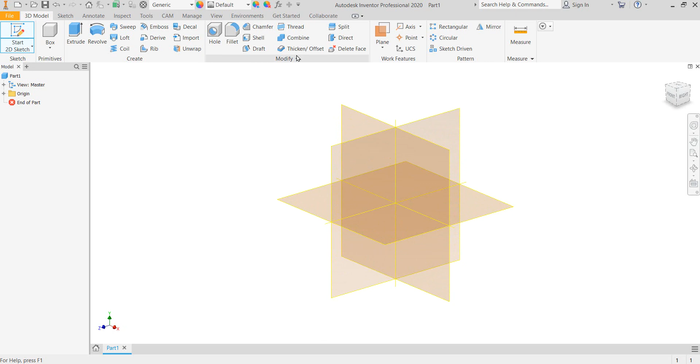We're going to start with an inch English part, and I want to do a 2D sketch on my front surface plane. I want to start with the cylinder at the left end, so I'll go with a circle at the origin.

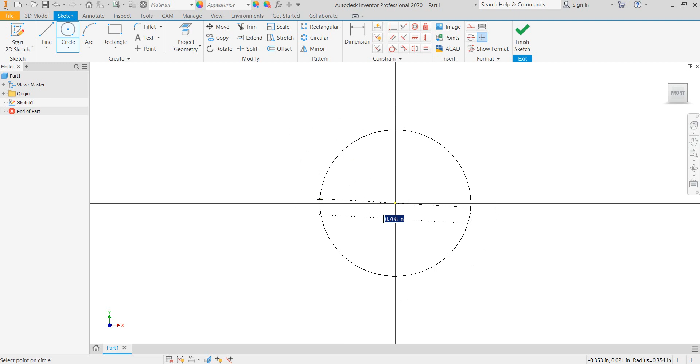This has a diameter of 1.25. Let's extrude that symmetrically, 1 inch thick. Okay, so that's got my cylinder to the left end.

Now I want to do the arc at the right end, and the reason I'm doing this in different pieces is because we have different thicknesses of extrusion. So I'm going to start another sketch on my same front plane, and I'm going to do a circle, and this one has a radius of 1.25.

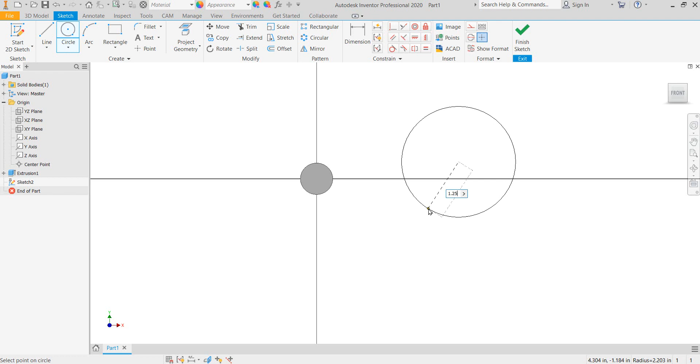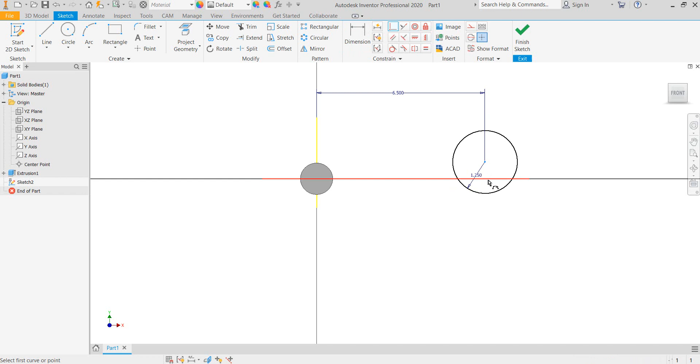I want to dimension it and align it, so I'm going to project some geometry here. We see that that is 6.5. I'm going to do a coincident constraint onto the axes there. I'm fully constrained, and so now I'll extrude that symmetrically, and it is 1 inch thick also.

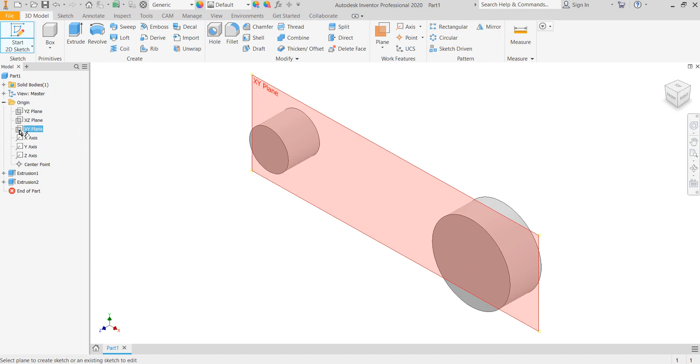Did that go 1 inch thick? Yeah, alright. So now we'll do another sketch on the same front plane, and this is going to be my handle, the horizontal part there. Let me slice my graphics so I can see things a little better.

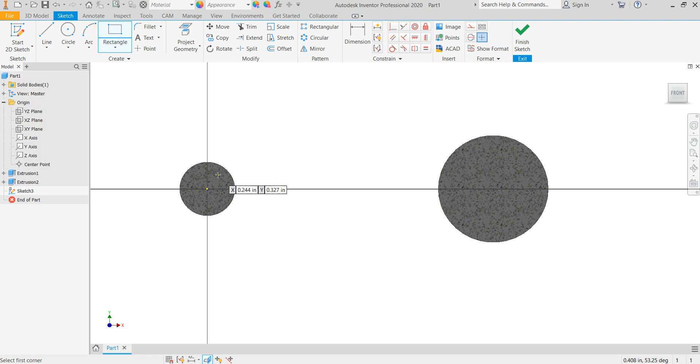We can do a rectangle, or it doesn't matter, we can do lines. The problem with rectangles is once we trim it, we end up losing some features. So I'll go ahead and do that. This is going to be kind of wonky out here, so I'm just going to draw it.

Then we've got a couple more arcs, so I'm going to put a circle and another circle. Let's get this one taken care of first. The height of that is 0.75, and I want it to be centered, so I just did 0.75 divided by 2, which centers it up.

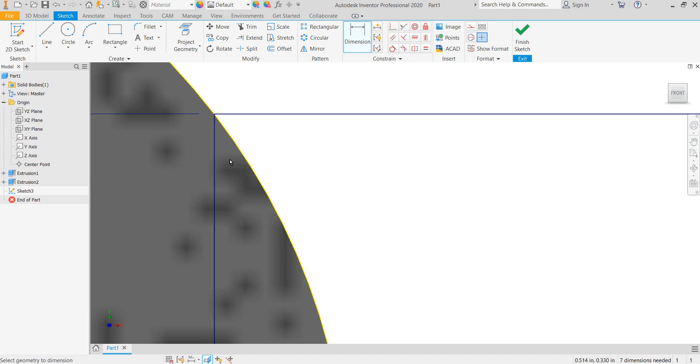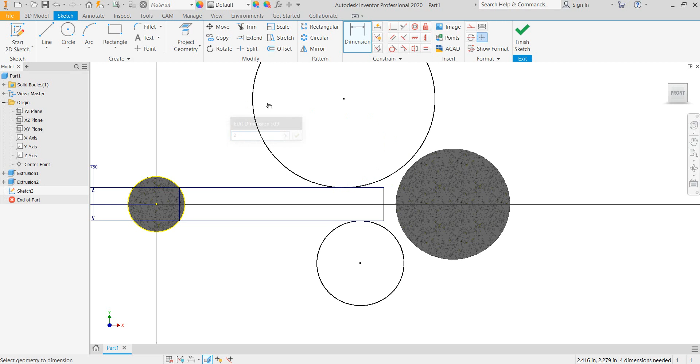It should have a coincident constraint on that corner. It does, okay. Now then, let's go tangent this circle to the top, this circle to the bottom. These are a radius 2 circle, so dimension type radius 2.

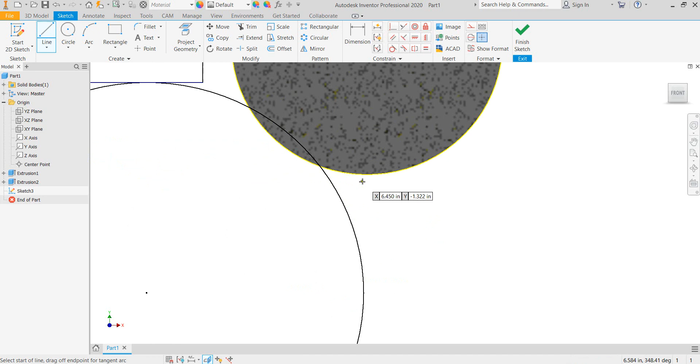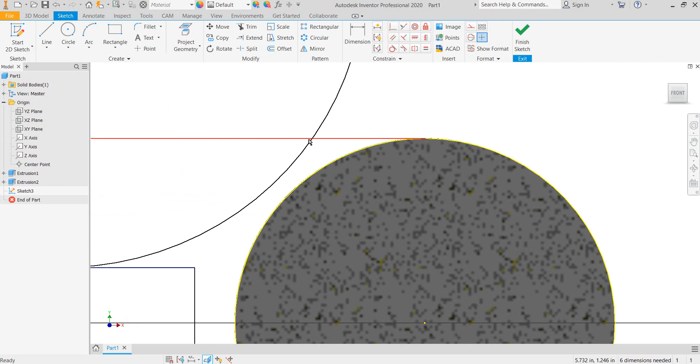And let's go with an equals constraint. Now then, we need a line that comes from the top of that over horizontally, and let's do that again at the bottom. We notice it's 0.75 back to this point right here, should be 0.75.

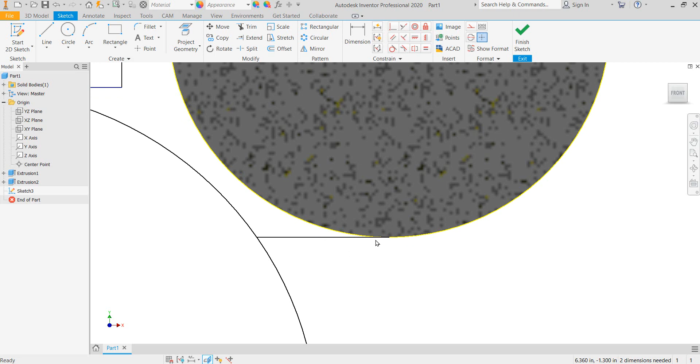So let me trim those lines out and do a dimension there, and we'll do an equals constraint. That one didn't get a coincident on there, so let's try a tangent on there. Okay.

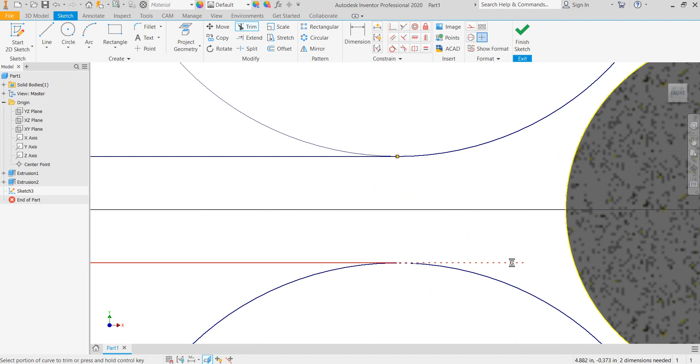Now let's trim a bunch of that, and let's put a connecting line across there. That's kind of weird, okay.

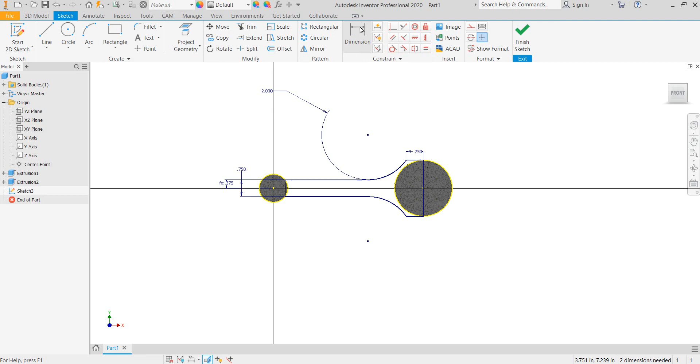Alright, so now it's asking for some more dimensions. Let's just see what Inventor says we need. We ended up with a weird little point right there, I'm not sure where that came from.

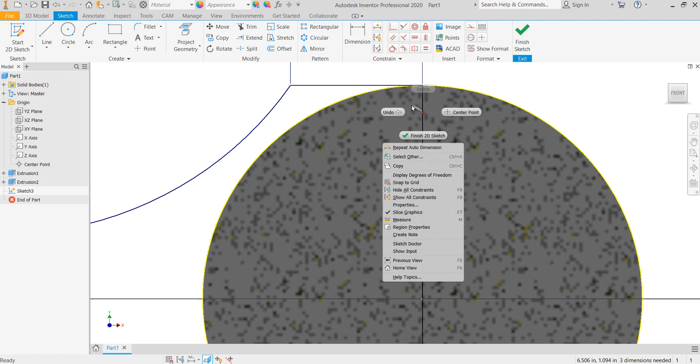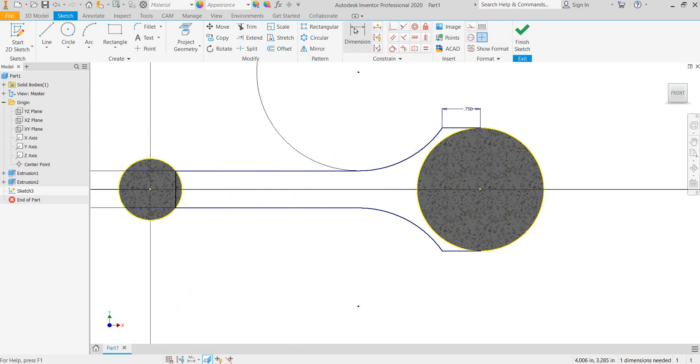But now it says I need 3 dimensions. Weird. So I'm going to... there, what is that? I'm not sure, I ended up with a second line in there somehow. So let's draw a new line connecting those.

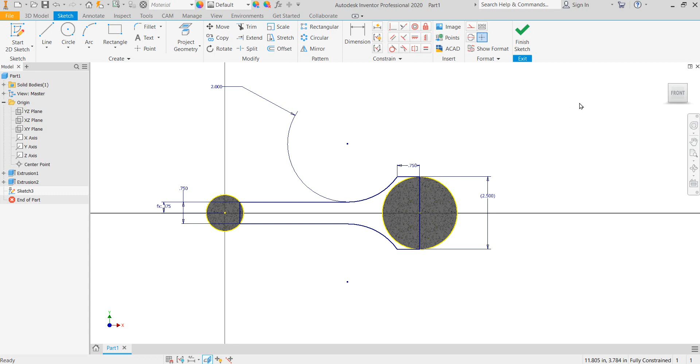Okay, what does it say I need? Ah, okay, needed a constraint right there in the middle. So that's cool, and now I can extrude this. I want to go symmetrical, and it is 0.5. That's looking pretty good.

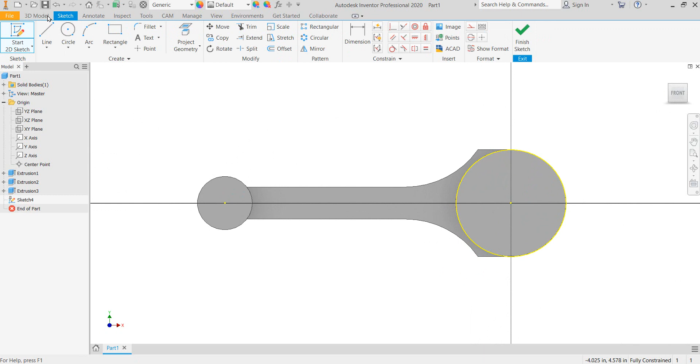So now let's cut the end of this off. I could have done that earlier, so I'll do a sketch on that plane and draw a line through the midpoint there, and we should be able to extrude and cut that. So I'm going to cut through all. Okay, that's looking right.

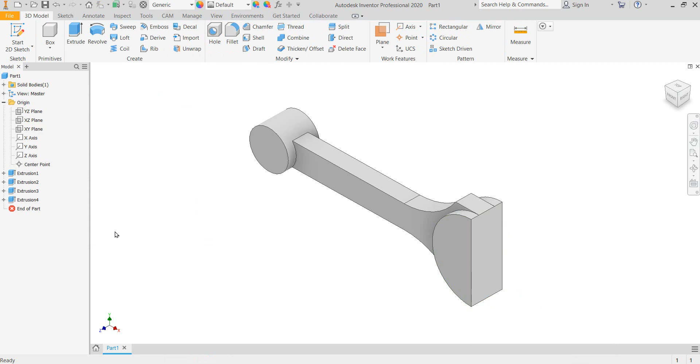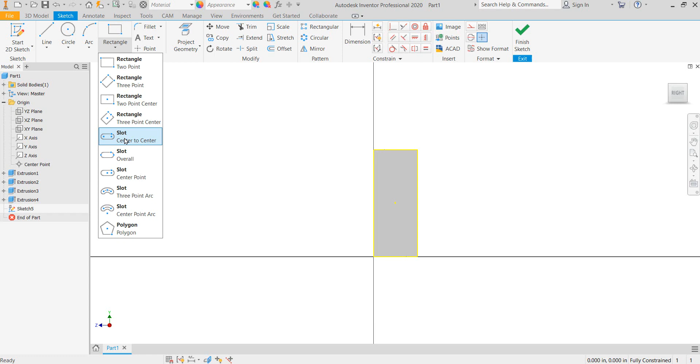Now we're going to use the slot tool on this end to create the rounded parts at the top. So I'll do a sketch on this surface and go to my rectangle, pull down, and go slot. Let's go center to center—no, I think slot center point probably works best. So there's my center, because of my axis, my origin, I'm going to click there.

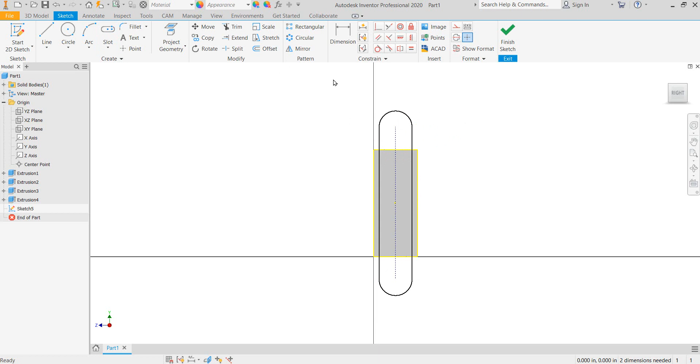And just drag straight up, so I got a perpendicular constraint, click, and then go out. Now let's put some dimensions in. This has a radius of 0.25, and it is 3 inches total end to end.

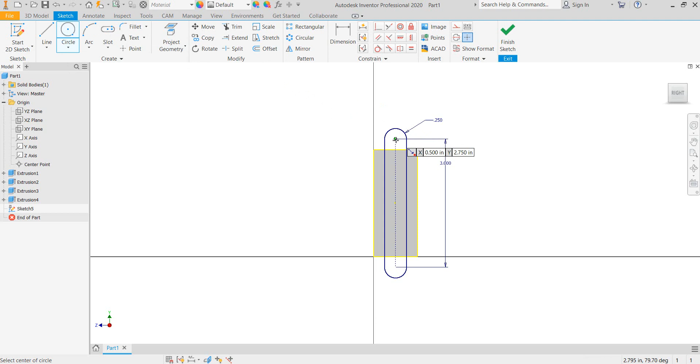Okay, and my hole goes all the way through, so I can go ahead and put in these holes here, and they are a diameter 0.25. Do another one at this end. 0.25, that should be diameter. Yep.

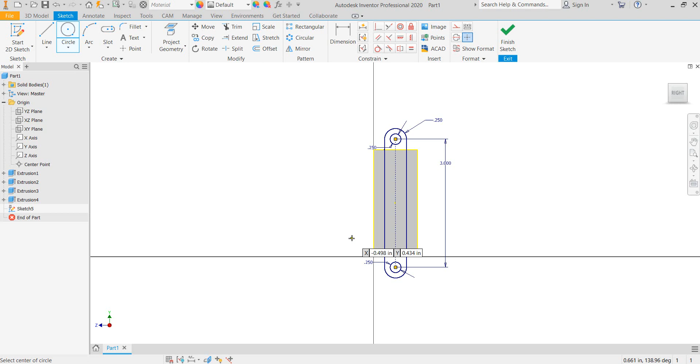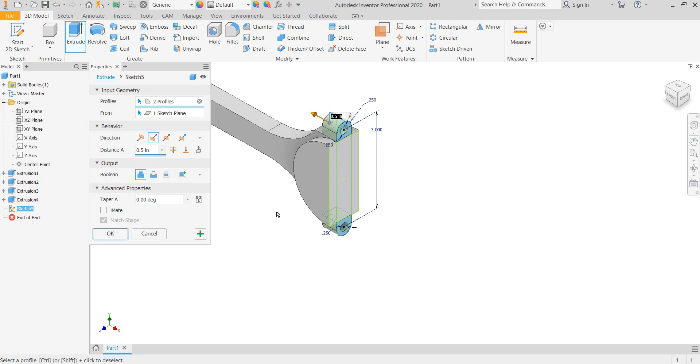Okay, and now we can extrude that back a distance of 0.5. Change my distance back to 0.5, that's correct. Okay, so now I've got my gross shape, if you will. Let me pause this video and start another one, and then we'll finish up with all the other stuff.